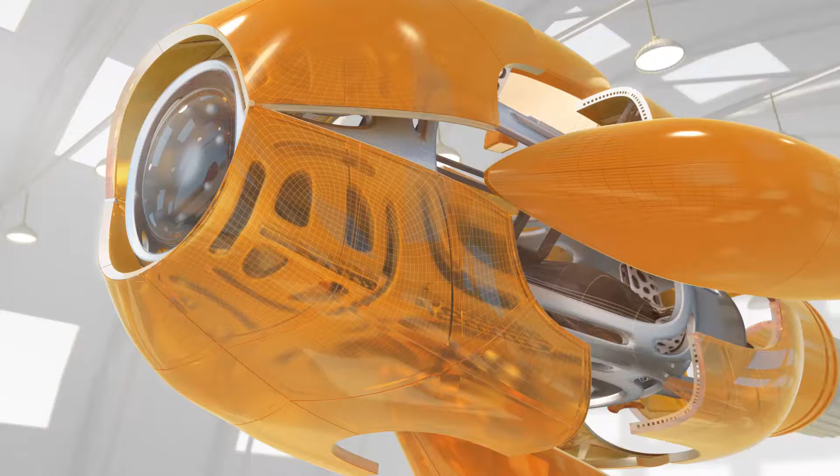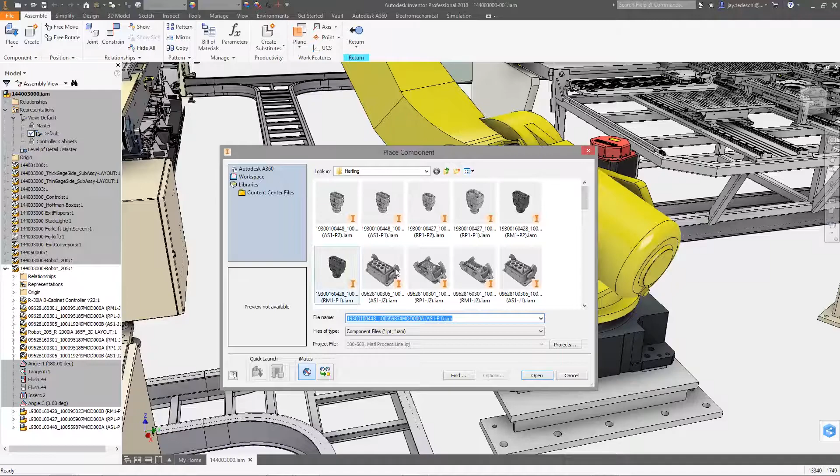Designing electromechanical systems presents a significant collaboration challenge. Ideally, you should be able to design your electrical and mechanical systems simultaneously, sharing up-to-date information between your electrical schematics and your 3D models. Autodesk Product Design and Manufacturing Collection helps bridge the gap between electrical and mechanical designers by connecting your individual tools in real time.

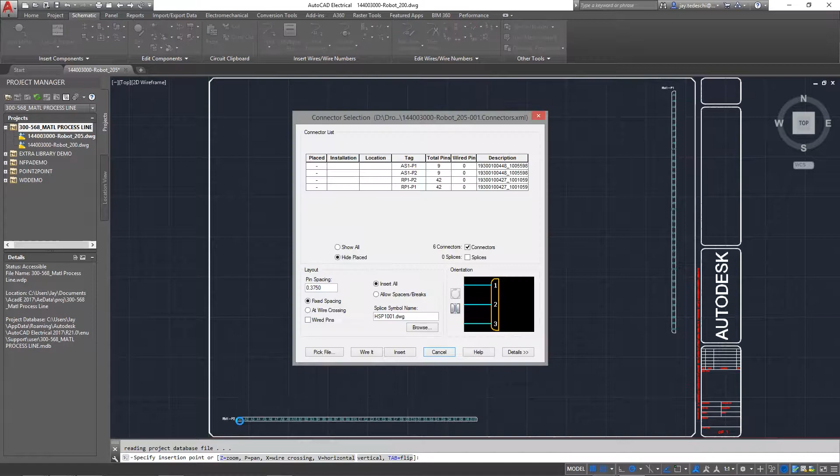Let's take a look. The foundation of this workflow is the ability to share information back and forth using a simple electromechanical link. Once established, you can start sharing live data between Inventor and AutoCAD Electrical. Any changes you make in one system are quickly synced in the other, so everyone is always working from the latest version of the design.

The Location View is a shared module between Inventor and AutoCAD Electrical that shows all components and wires in your design in a single location. Components are listed by installation and location, making it easy to keep both applications in sync. And linking CAD files from your 3D models to their 2D schematic counterparts can be done simply, all within the browser.

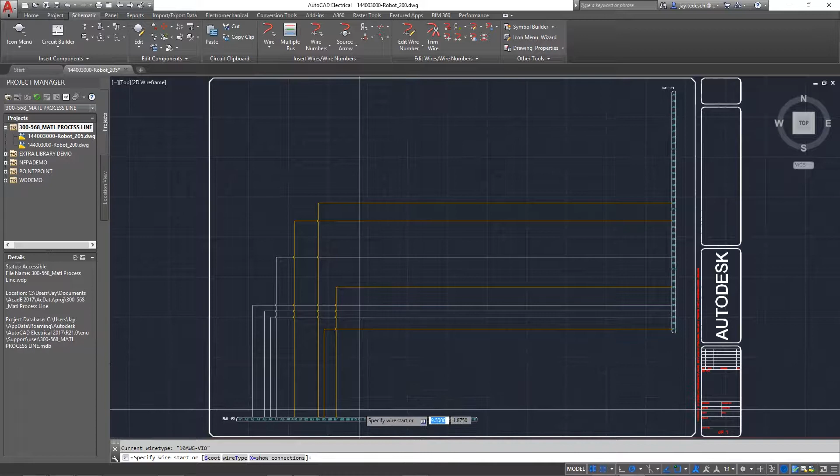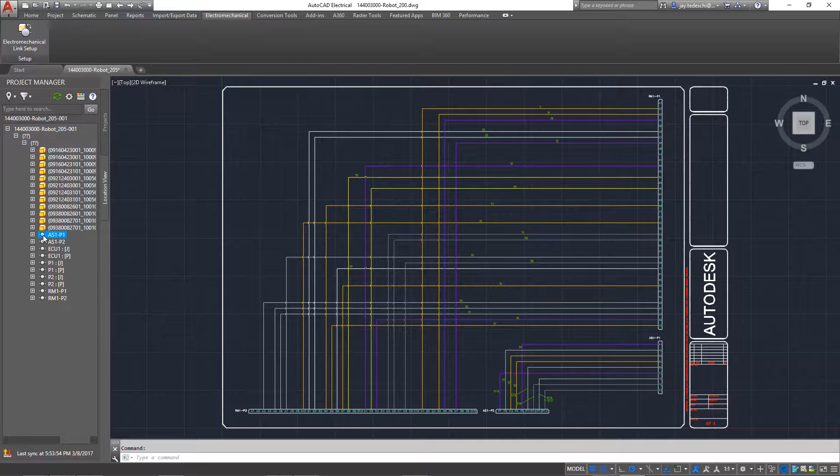There is also an electrical catalog browser for Inventor, so you can insert 3D parts by selecting a catalog value that is linked to the AutoCAD Electrical database. You can download 3D electrical component models from vendors or create your own and associate them to a specific catalog value. The part will then be associated for future use, so you can build up your electrical library for future design work using the same components.

Once all your components are placed, you can automatically create all the cable and wire connections between them. And whether the wire connections are created in AutoCAD Electrical or defined inside Inventor, they will always be in sync with each other, updating anytime changes are made in either software.

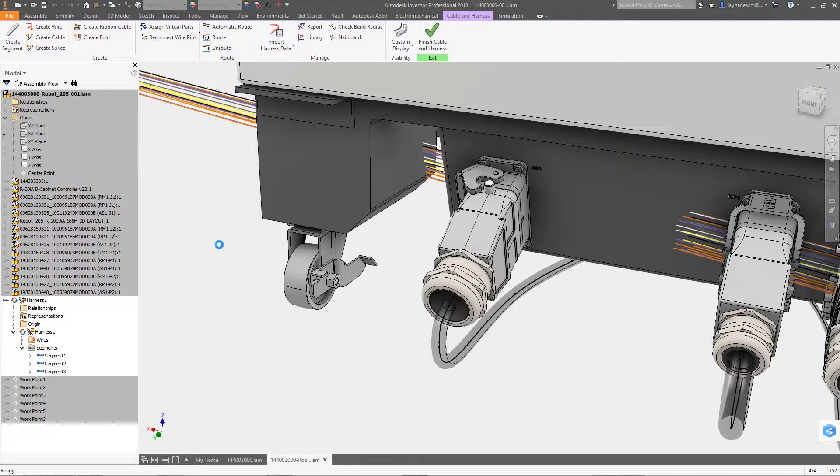When you need to design complex electromechanical systems, you need tools that can speak the same language. With the Product Design and Manufacturing Collection, your mechanical and electrical engineering teams are always working together from the same point in the development process, helping move the design forward.